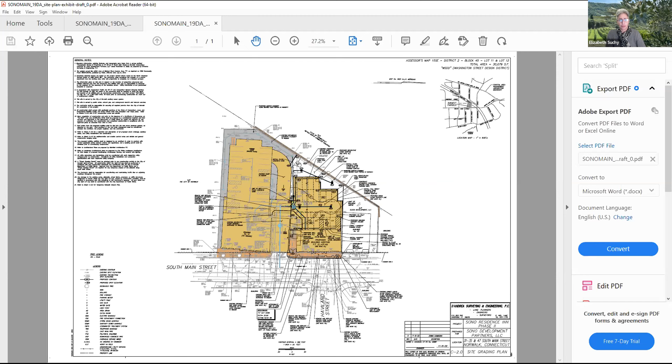Anyone have any other comments for Derek or any questions for him or myself? I do not. If you'd like, we can show you an elevation image of the front of the building. I believe Colin Berthier might be able to do that, just for informational purposes. Sure, I will stop share then. Great, thank you.

So there you go. The existing building is on the left, and that was completed in approximately 2019. The new building would be on the right, connected in the middle, floor to floor.

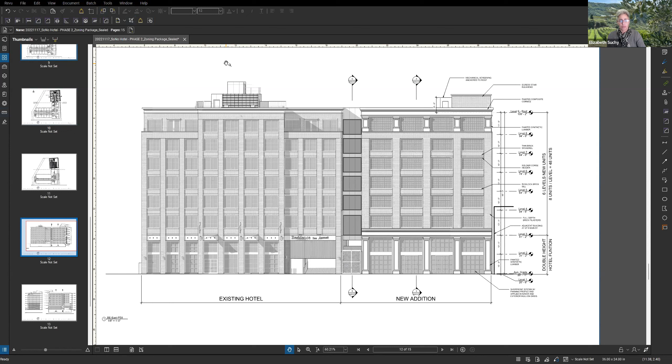In answer to one of the earlier questions, not only was a special permit application filed with the Planning and Zoning Commission, but also a coastal area management application. This is a referral to you because of that CAM filing and because the property is within 1,000 feet of the coastal resource, namely the Norwalk River. But as Derek indicated, it's on the far western boundary of the coastal area management zone, and the coastal resource is interrupted by sidewalks, curbs, streets, and other developed properties all the way down to Water Street—in an already developed urban area.

If anyone has any other questions, we're happy to answer them. I would just say I'm very pleased to see the need for additional hotel rooms in that location. I think it's terrific that the hotel has worked out and needs to expand—that's a terrific development.

Agreed. All right, well, I propose we just hold off on taking a vote till we get Jeff Mangels and John here—they help craft the language of the motions better for us. But I don't think we have any problems with it as we stand right now.

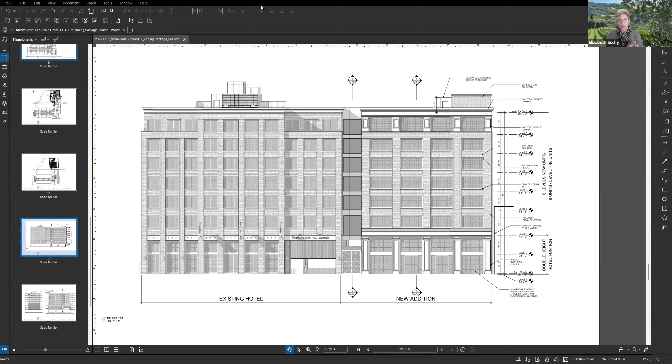The next agenda item is 121 Old Saugatuck Road. Kevin McLaughlin, the applicant, proposes to replace and repair sections of an existing seawall and construct a dock at the location. The proposed dock consists of an 11-foot long by 3-foot wide ramp attached to an existing seawall in the location of a previous dock, and a 7x14 float with a 4x5 landing float. The float will be held in place by twin stiff arms. The ramp and floats will be constructed off-site and brought on-site for installation.

Yeah, John, let me know about this—he didn't exactly type this up correctly. It's 2 separate applications, one for the seawall and one for the dock, so we can consider those separately.

Is there anybody from the applicant on the call? Yes, Tom Ryder here from Landtech. Hi, Tom, go ahead. Would I be able to share my screen? Please do, thank you.

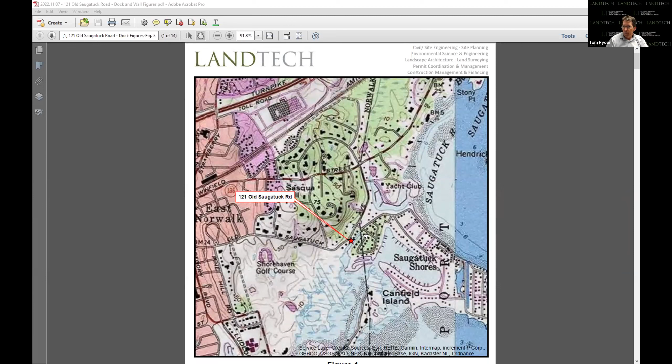Okay, so we just have an application for 121 Old Saugatuck, shown here by the star. It has water access to Canfield Creek. Just scrolling down, I've highlighted it here for best viewing.

This is an existing seawall. Right in here, there is no seawall. There is a tidal wetland area in this entire area. And then there's a seawall that goes from here over here and then down here. We can show it better on the site plans, but this is a good explanation on the aerials.

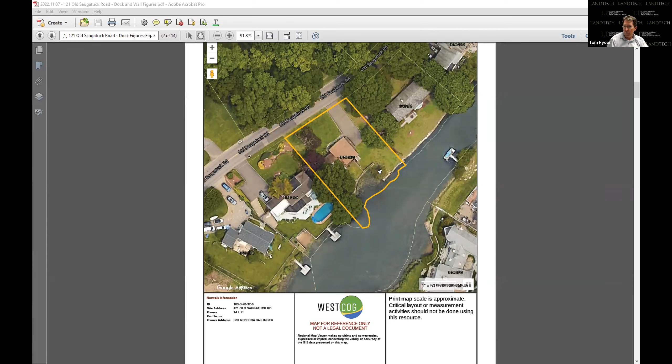What we're proposing is a dock right here, and then a seawall section to be replaced here. Then we're going to be fixing the rest of these as we go along. This one will be a section which I'll show you later. It's hidden by the trees, but this section here will be replaced. This small section here will be replaced. And like I said, the rest of them will just be repointed. Then there will be a top cap put on the entire wall.

But the application itself, I'm sorry, way too quick, is the dock first. I have both sets of plans as stated. Yes, this is 2 applications.

One is for a 440 dock and one is for a COP. The reason for the 2 applications is because a COP is designed to modify or authorize existing structures, whereas you cannot add a dock under the COP. So we had to file a 440 dock application separately, but we're presenting them both tonight together, basically.

So what we have here is this existing area. There's a little divot here where there was an old step from an old dock, and we're just putting the dock back in the general location.

Obviously, we can't put any piles in here, so we're going to go with 2 stiff arms and then just a ramp to a float system.

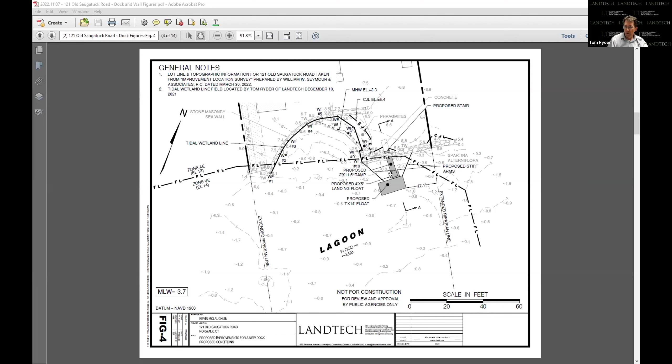We're at the final stages of DEP review, and they have asked us to elevate this section here. So we put a step in there, and I'll show you the profile, just to cover up over the Spartina vegetation, which is typically what they want and what I like as well, to give solar access to the plants. And then this is basically what it looks like.

We have the wall here, we're elevating it slightly here, and then we have a little step here, and then the ramp and the float. And the float, as per our standards and DEP standards, has 18 inch high float skids.

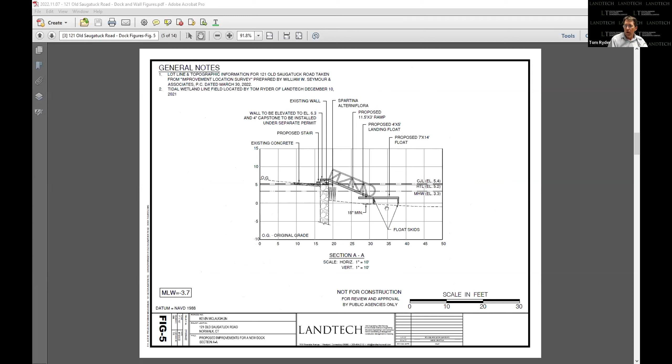We like to put the aerials, everything on the aerials, to give this a spatial understanding, but this is basically what it looks like.

I guess at this point, since we are looking at two applications, I can continue with the walls and we can just answer questions at the end, or I can open it up now and discuss the dock portion at your leisure. Why don't you go straight through the wall?

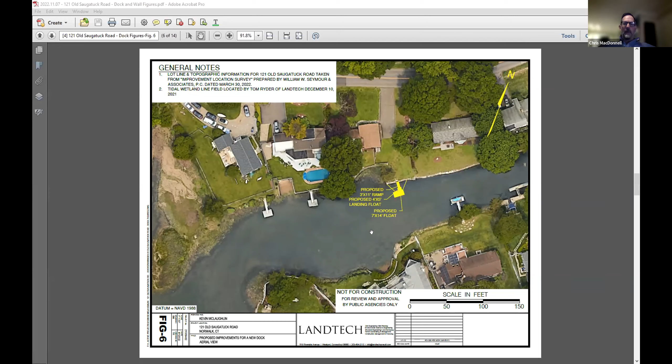Okay, great, you can hold your thoughts. So here we have the wall. Again, this was the area here with the dock. This is an existing wall, and then it has a small return. And then there's a wall here that goes down here and then comes back.

This area here is going to be replanted. There's a bunch of invasives in here. We're going to replant this whole area with a nice native area. The reason for this is this house, there's no longer a house here. The person had purchased it, took the house down and put a new house up. And now we're fixing up the shoreline as well.

So we had a mason come out and look at it, and our engineer looked at it. This area here needs some work for rebuilding, so we're rebuilding this one section. We originally had concrete blocks placed in there, just as kind of a lower profile for the mason to step on, but the DEP didn't want the submerged boulders or the submerged blocks in there.

So now what we have is sheets of plywood, and this will be done during low tide. They're going to put some sandbags down here. It might be a little precarious, but he says he's done it in the past and it has worked for him, so we're proposing that.

And then, like I said, over here will be another section. This one's only about 2.5 feet tall, not even, so it's a really small return wall. It's just in disrepair, but we're including it as part of the application as well.

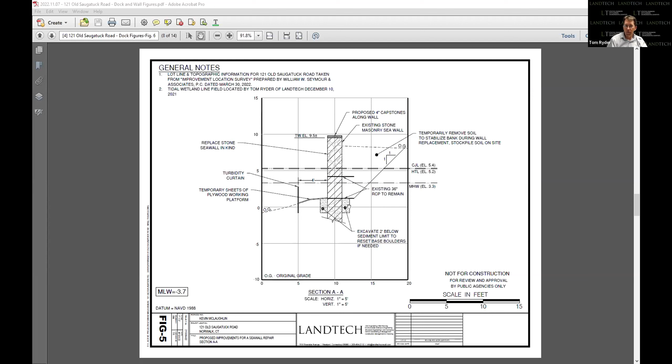And then we have certain profile features on here, but I don't really know how much we need to get into. That's up to you guys if you want to get into the details, but basically it's all profiles. I think this provides the best information for me to present as well. So that's really it for repairs or reconstruction, repairs, and then the dock.

Like I said, I have that aerial photograph, we want to go back to it and discuss there. I have some photographs of the site at the end if you'd like to see them, but that's basically the presentation. Okay.

And what's mean low water? It's minus 3.7, which is out, about minus 2. So the dock will sit on the bottom on the skids. Correct, yeah.

Is there any modification to the wall to construct the landing for the dock and the bridge over that? Well, there's a little step down here, a little concrete platform, and then another step down, which I have in a photograph I can show you when I get done with the plan view.

So we're filling that area in, and then elevating the dock to 5.3, which is the rest of the wall. Right now it goes down about 18 or 12 inches. We're going to level that off and put a little step behind it so the dock can be elevated again to provide solar penetration to the vegetation. So that's the modification to that wall. We're also going to have a cap put on top of all these walls. There really isn't any reconstruction work here, just kind of modifying it for the dock.

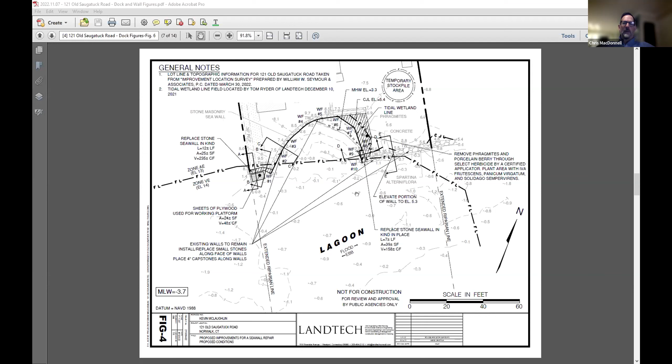Well, again, I think we'll wait for Jeff Mangels to make sure we get our response wording correct. But I don't have any problems with this at this point. I have no objection at this point.

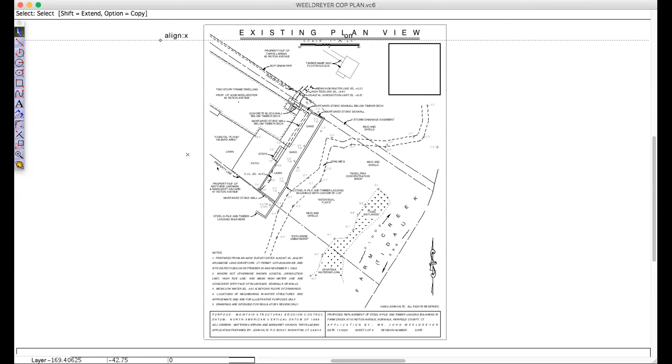Can anyone hear me? We hear you, gotcha. I'm having trouble, I lost my link. I'm on my phone. Could someone tell Amelia to send me the link and maybe I can get back on? I'll resend it to you now, Dennis. Thank you. All right, it should be in your inbox. Got it, thank you very much. Sorry for the inconvenience here.

All right, can everybody see this? Yes, okay. This is the existing plan view. Here's the existing wall, and there's the jog I talked about. All right, here's the drainage easement, which extends the lots in this waterway. For some reason, the property lines extend well into the waterway. Obviously nothing can be built there, but I guess whenever they were created, that was a different time and a different world. So there's your existing wall.

Let me see if I can show you the proposed. Okay, and here you can see the new wall, which basically, again, we go away from the drainage easement. We bring the wall around. We have a return at both ends. And then we have that small concrete knee wall below the porch itself.

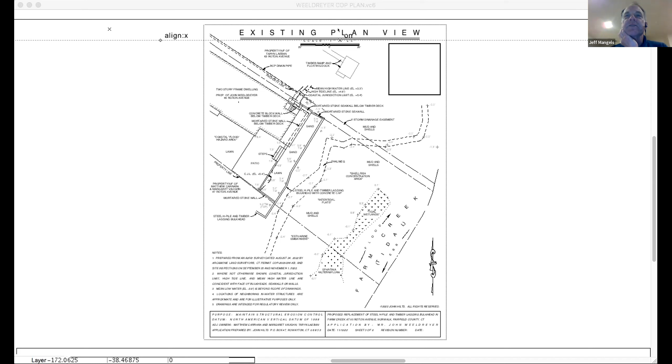John, I think we're still on the former drawing. You don't see that? We're on the existing plan, yeah, I think you have the existing plan still. All right, let's see what we can do here. Technology at its best. Well, we're all doing fun stuff here. Let's see if I can see, let's try that one. No. Well, the wall's straight, so I think that indicates it's the proposed. Exactly.

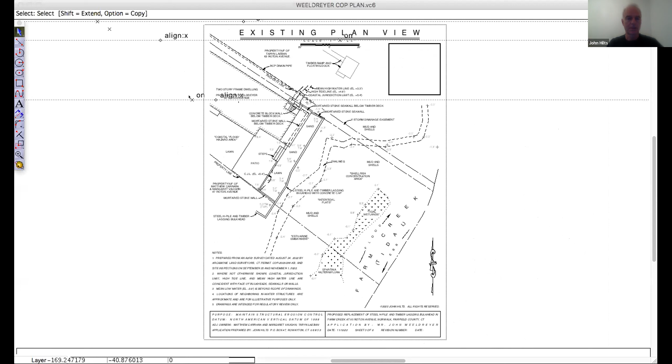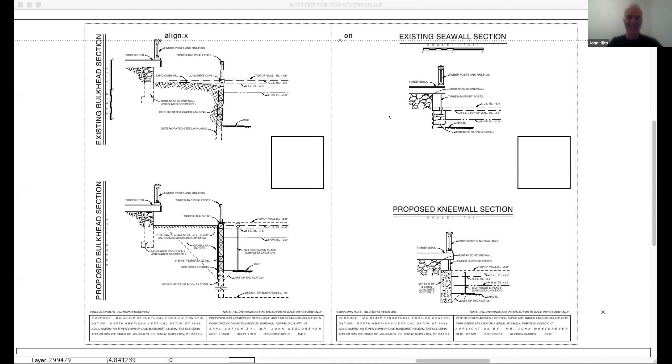No, I'm not doing too good here. I have confidence in you. Thank you, Jeff, I appreciate that. There you go. Well, that didn't work. I'll try again.

That's just showing the existing, isn't it? I don't see... no, that jog. I think that's the new one. Alright, that's the new one too, because it's straight. Fine, if that's the case, I guess you're seeing what you want to see and what I want you to see.

So that being the case, the wall is pretty straightforward. There's access through the side of the property. And the area basically between the patio and the porch, waterward of that and landward of the new wall, will be at elevation 5.4, which gets enough salt water inflow through the wall itself and through overtopping on higher tides to support the new vegetation, the spike grass.

So what happens at the south end? Is that you show an extension below the property line? That's existing - this wall originally, for some reason, I did work at the adjacent property some years back, and who knows. So they built the wall so that it went into that property. We're not proposing to do anything at that property. We're going to maintain that wall and make sure nothing gets disturbed there. There's a beam right basically at the property line, so that can be kind of left alone.

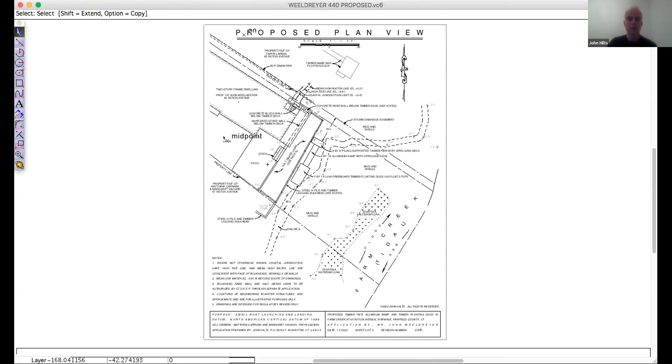All right, is that good for everybody? This is the landing, the pier, ramp, floating dock. The new wall is shown on this just for reference purposes.

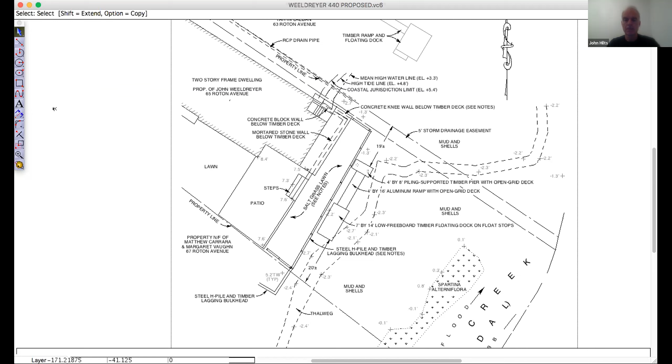Any questions or observations? So how many pilings are going in for the pier? The pier, 2 pilings, and they'll be beneath the footprint of the pier itself.

Is it a separate structure from the wall or is there a connection? Yep, it's separate from the wall. No hard connection to the wall whatsoever.

All right, I see that it's on float stops. I don't really have any other questions or objections. Is there any other comments, questions? I'm good with this.

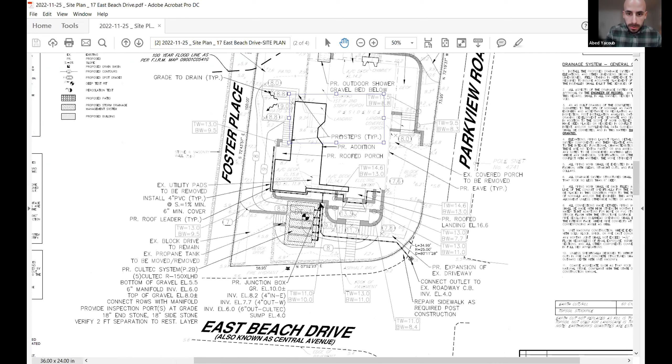The addition is on the north side of the property, facing Foster Place. Walls are around the east, south, and west side. The Cultec, as you see, is on the west side of the property, towards the East Beach Drive side. If you have any questions, I'm happy to answer.

Where are the Cultecs? They're right here. Oh, I see, okay. And what's going to run into those, roof leaders, driveway? What do you have collected to go into there? I believe we are collecting the roof leaders from the addition on the north side, and it runs back to the west side too. So roof collection, okay.

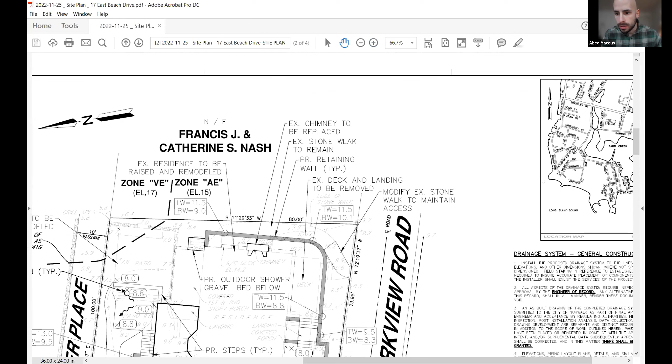How far is this from the water itself? It's fairly close, but not adjacent, right? Correct, so we are not actually a waterfront property here. I have the locus pulled up, so the Long Island Sound is to the south. Let me try to make the locus a little bigger here so everybody can see. So the water is down over here, let me try this. The Long Island Sound comes around here, we're right here, so not directly facing the water.

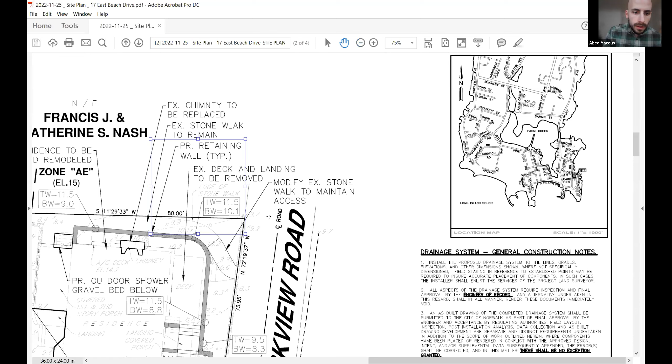Does anybody have any questions? What's the height of the retaining wall? Let me see, let me try to zoom out a little bit again here. We got about 2.5 feet on the northeast side, 3.5 feet on the north side of the property, a 1 foot retaining wall over here, and it's 2 feet over here. So I think we try to maintain some under 4, if I'm understanding correctly. So it's not an overly high retaining wall.

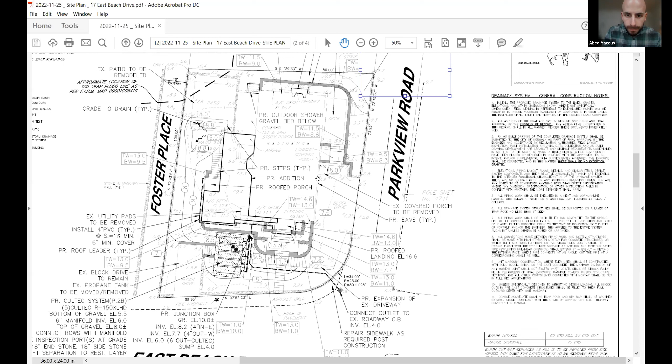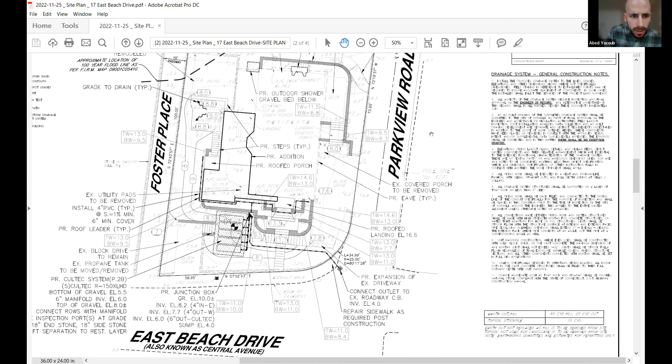Is the outdoor shower existing? Let's see, I'm not sure if that was an existing shower. Sorry, I'm just trying to get oriented here. Which side was the shower on? You could see it's opposite the beach, so I'm not sure how you have this set up, but I would say maybe north. Yes, so that is a proposed outdoor shower with a gravel bed below.

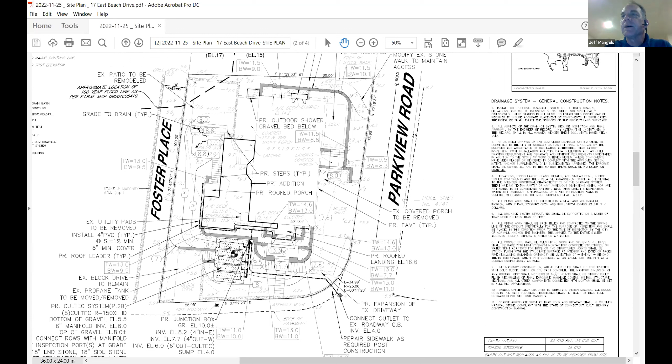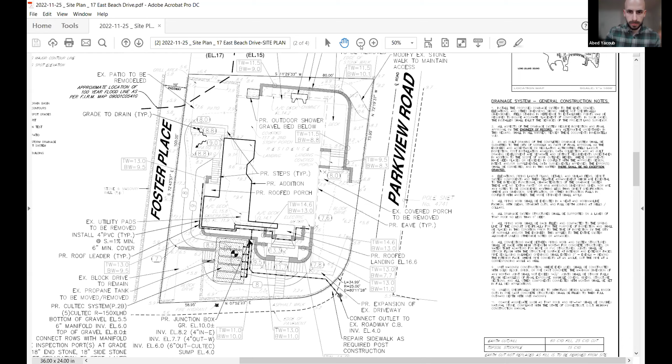Do we have to collect the water from the shower? Is there going to be a collection for that? I believe the goal was to have the gravel bed serve as a dry well and serve as the primary collection point for the shower. Everybody builds those, but nobody ever uses them, so I'm not really worried about the annual volume of runoff from that. You have to wash the dog somewhere.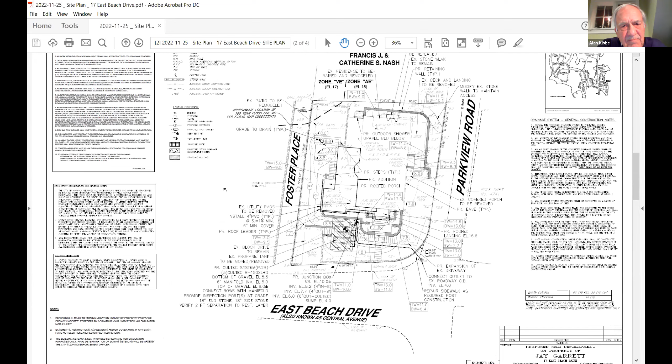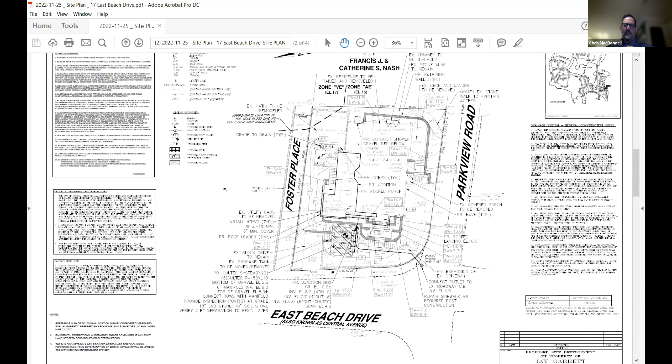Okay, well, I don't have any questions or objections at this point. With the Cultec, it'll improve stormwater runoff. So I think we're good.

Excellent, depends on how long you take a shower for, but yeah. We'll make sure there's plenty of stone underneath that shower. Okay.

So again, we'll wait and take a vote once we know the formal language. Okay, correct. Very good, I don't have any other questions. Is that it, Chris? Yeah, that's it.